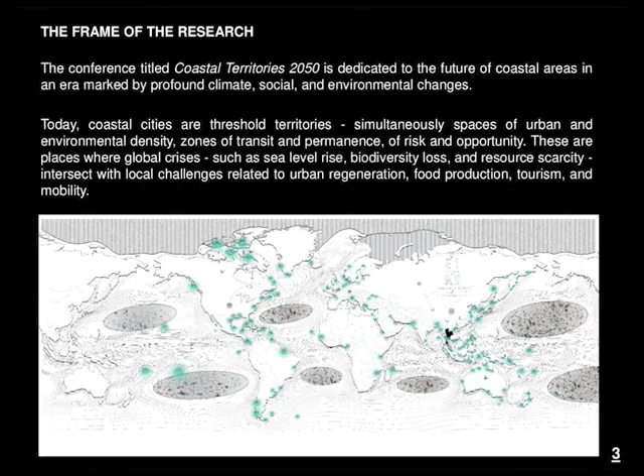In this context, the conference presents strategies and projects for adaptation and transformation, addressing key themes at the heart of global tensions that question how we inhabit the world: climate change and sea level rise, coastal erosion, extreme weather events, coastal urban regeneration, new hybrid infrastructures, architectural adaptation and resilience, conscious tourism, local production, and food security.

Intervention in contemporary territories and cities cannot be limited to repairing damage or mitigating risks. It must anticipate transformations, generate resilient models, and propose new forms of living and producing that can adapt to evolving environmental conditions. The three case studies presented today put forward architectural, urban, and infrastructural strategies that address these issues in concrete, experimental, and site-specific ways.

The conference focuses on three core thematic areas, each illustrated by emblematic case studies located in geographically distant places, yet united by a shared condition of possible transition between land and water, between center and periphery, between infrastructure and landscape, between vulnerability and opportunity. 1. Climate adaptation and amphibious architecture.

The rise in global temperatures and sea levels raises fundamental questions about the habitability of our territories. How can we design in unstable environments, balanced between land and water? The proposal developed for Ban Don Bay in southern Thailand introduces the concept of amphibious architecture as a concrete and adaptive response to a vulnerable context, blending spaces for food production, local economy, and new forms of social interaction.

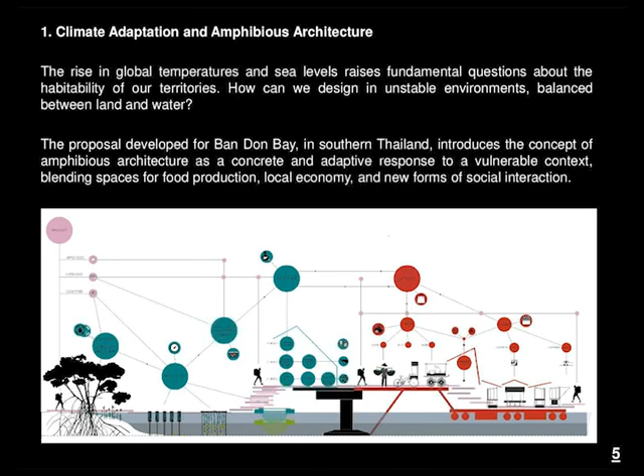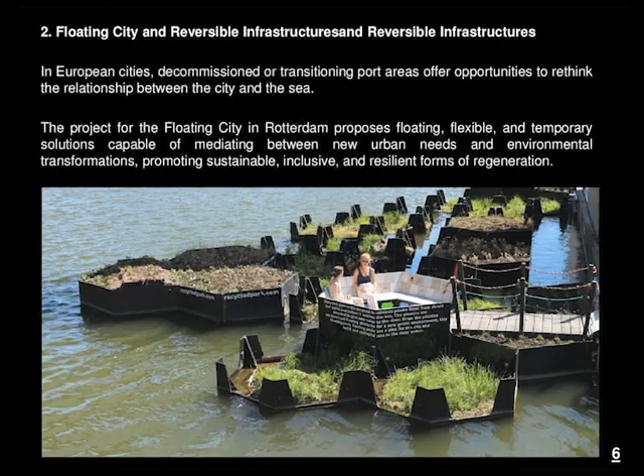2. Floating city and reversible infrastructures. In European cities, decommissioned or transitioning port areas offer opportunities to rethink the relationship between the city and the sea. The project for the floating city in Rotterdam proposes floating, flexible, and temporary solutions capable of mediating between new urban needs and environmental transformations, promoting sustainable, inclusive, and resilient forms of regeneration.

3. Urban transition and new centralities. The cities of Trapani and Palermo provide a starting point for reflecting on dynamics of obsolescence, reuse, and infrastructuring. In particular, the focus is on metropolitan mobility, connections between port and city, and the enhancement of residual spaces, proposing solutions that combine public functions, scientific research, and conscious tourism.

The goal is to redefine the coastal edge not as a boundary, but as an active interface between nature and the city.

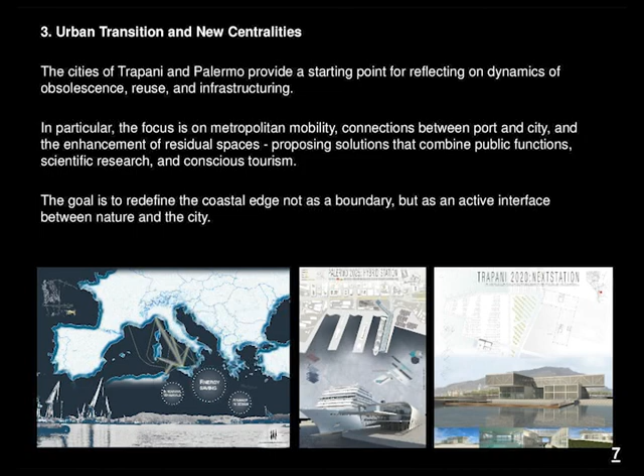Thailand 2022, Plug-in System: Sharing Farm in Don Sak. Climate change refers to variations in temperature directly or indirectly attributed to human activities. The effects connected to the hyperbolic rise of temperature are multiple, from the rise of seawater to extreme weather events to the reduction in the world's food stock.

In the south of Thailand, the climate and water of the estuaries have been drastically transformed over the last few decades. Surat Thani has become an outstanding urban and industrial center. In this place, strongly characterized by irreversible natural and anthropic phenomena, the thesis identifies a project area on the island.

of Koh Rait Ban, which is about 500 meters from the coast. The presence of a bridge connecting to the peninsula has led to the gradual creation of the urban habitat and the fishing community, which has gradually established itself in these places, exploiting the lush fauna of the Bay of Ban Don Bay.

This project is the final outcome of a thesis that originated during the 2016 workshop, Amphibious Architecture, held at the Escuela Técnica Superior de Arquitectura de Madrid, as a potential field of research for an architecture capable of adapting to the changing nature of coastlines.

This theme was explored at the international conference ICAADE 2015 in Bangkok, where the term amphibious architecture was defined as a design strategy to cope with floods using light and temporary structures capable of floating during unexpected flooding events.

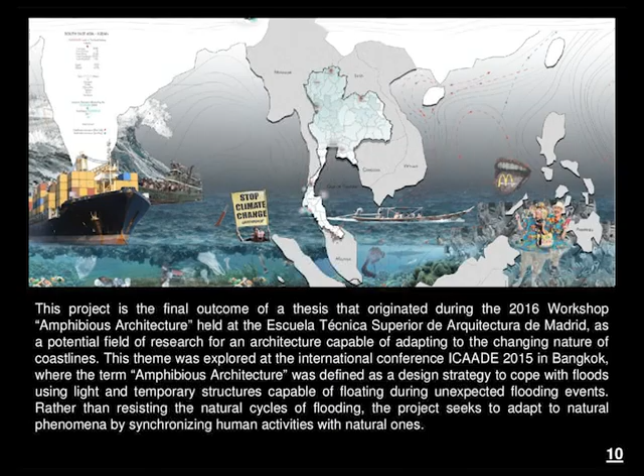Rather than resisting the natural cycles of flooding, the project seeks to adapt to natural phenomena by synchronizing human activities with natural ones. The following video shows the current state of this area, Surat Thani Province, in southern Thailand, which consists of 49% high mountain ranges and the rest muddy plains.

Surat Thani is a unique territory for experimentation due to the presence of tidal flows along the coast, which compel residents to adapt to these coastal phenomena.

Along the 100 kilometers of the lower Gulf of Thailand, the Tapi and Phum Duang rivers flow into the sea. Their convergence with saltwater creates the ideal conditions for mangrove growth and supports a rich ecosystem of wildlife between the coastline and the estuary. Tidal flows are prominent in this region, shaping the biophysical and hydraulic structure of the lower Gulf and encouraging sedimentation, resulting in water depths ranging from 1 to 5 meters.

Over the past few decades, the climate and estuarine waters have been drastically transformed. Surat Thani has become a major urban and industrial center in southern Thailand.

We visited local villages and we also visited the industry, fishing villages. I would say lifestyle and way of life and the way they work, everything is linked to the water. The time frame is continuous. It's really an amphibious architecture.

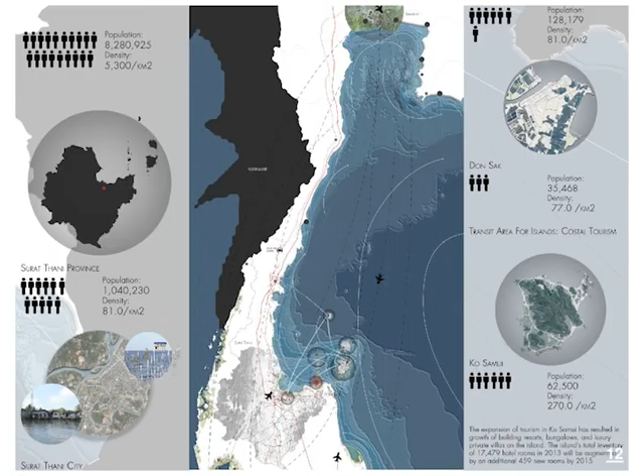In response to increasing climate instability, the project aims to propose not only an architectural intervention, but also a model of circular economy, microproduction, and food self-sufficiency involving local communities and enhancing traditional fishing practices.

In Thailand, aquaculture is a widely practiced activity, especially in the southern regions, where the presence of mangrove tree species, particularly in coastal areas and near river estuaries, favors both the formation of micro and macro habitats that make the waters rich in nutrients, and the mitigation of flood risk.

These are just some of the themes explored in this thesis, which, starting from the effects of climate on the physical and human environment, also seeks to address issues related to the economic and tourism systems of these areas, places heavily subjected to a mass Western tourism that is often disrespectful of local communities and their territories.

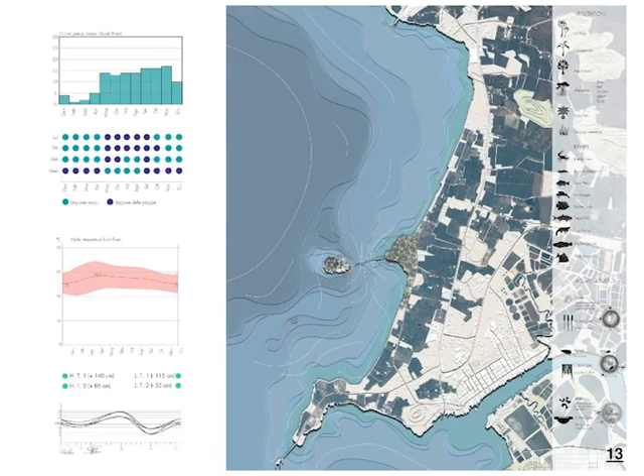It is precisely the process of tourism exploitation over recent decades that has allowed Thailand to triple its tourist numbers, based on mass consumption not only along the coastlines, but also in major cities. However, it is clear that today it is impossible to forgo the significant opportunities for economic growth, even at the risk of the peninsula's entire marine ecosystem.

Recent scientific publications have confirmed that one of the main causes of the destruction of entire coral atolls is the reckless and irresponsible tourism of recent decades.

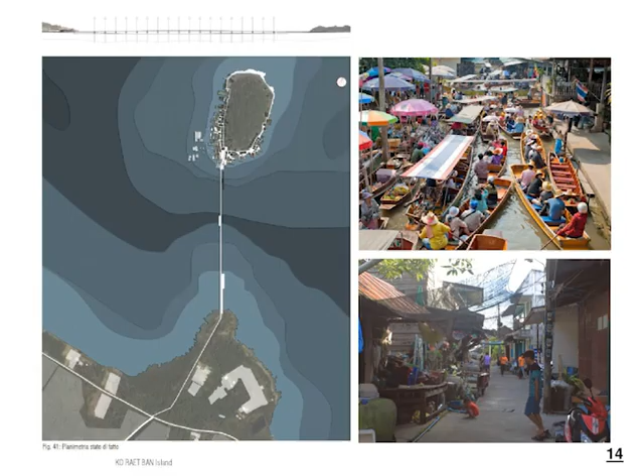The issue of economic responsibility is one of the key strengths of this thesis, which aims to broaden its field of investigation well beyond the discipline of architecture, engaging with major ecological, environmental, and economic themes that must be understood in order to explore the formal aspects of the transformations that can be proposed for these areas.

The presence of a bridge connecting the peninsula has prompted interaction with the habitat and with the fishing community that has gradually settled in the area, taking advantage of the rich fauna of Ban Don Bay.

Specifically, this thesis proposes the design of a sustainable zero-kilometer market, which uses local products by producing and consuming them on site. The main focus is the hybridization of market spaces, public use, and living. The goal is to bring together activities and flexible spaces that can be used continuously throughout the day and across seasons.

The critique of the massive exploitation of the coastline and rapid urbanization, which have led to the destruction of mangrove territories, the extinction of certain marine species, and the erosion of parts of the shoreline, frames the urgent context in which immediate action is needed, each contributing with their specific expertise.

Bandon Bay is now faced with the ongoing depletion of its marine resources, the economic exploitation of fishing, and severe pollution. Current urban development, especially along the coast, also disregards the natural tidal cycles, putting local populations at further risk.

Some questions aim to reflect on the possible future of these areas, which will soon be affected by the irreversible consequences of human and climate changes. What scenarios lie ahead for Bandon Bay? What economic prospects will there be for its inhabitants? Could the occupation of the water's surface become a moment of transition rather than a fixed frontier?

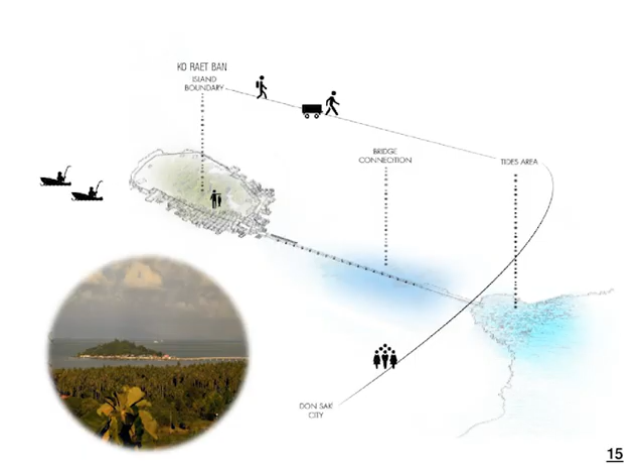The project proposes the use of materials sourced from local traditions, selected primarily based on their intended use. Two types of materials are used for the floating surface. The first, intended for modest areas, involves the use of recycled plastic bottles wrapped in fishing nets. The second, used for the construction of piers and docks, involves the use of floating plastic blocks.

The design of the various structures was developed to be built with bamboo canes, Dendrocalamus strictus, which are easily found in this region. Stainless steel was considered for selective use to reinforce the structural joints. The roofing is designed using natural, lightweight, multi-layered materials capable of providing adequate ventilation and rainwater collection. Additionally, some systems include a pulley mechanism that allows parts of the structure to move, ensuring proper shading.

The proposed activities for this area include aquaculture, fish processing, and sales. Each activity defines dedicated spaces for its related operations. The participants identified for carrying out these activities are, on one side, the local inhabitants, and on the other, tourists.

The thesis aims to link tourism activities with the traditional practices of local communities through an economic process that respects the rhythms and customs of the place. Therefore, the sale of seafood is considered a primary activity and economic resource.

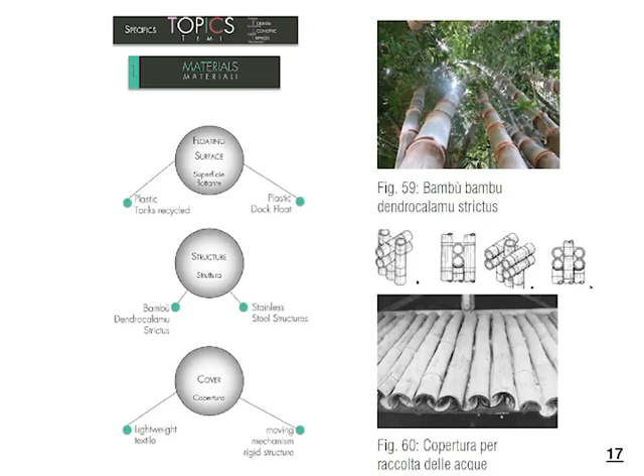A designated space is provided for processing, where oysters and mussels must be separated and purified. The sales activity includes market spaces that are organized according to the operations carried out and the types of products offered, which can not only be sold but also cooked on site. The market can function as either a permanent or a temporary installation.

Among the main themes is the idea of producing and consuming seafood at 0 kilometers, km 0. The benefits of km 0 are primarily related to the reduction of long-distance transportation of seafood and the support of sales networks located close to the production sites.

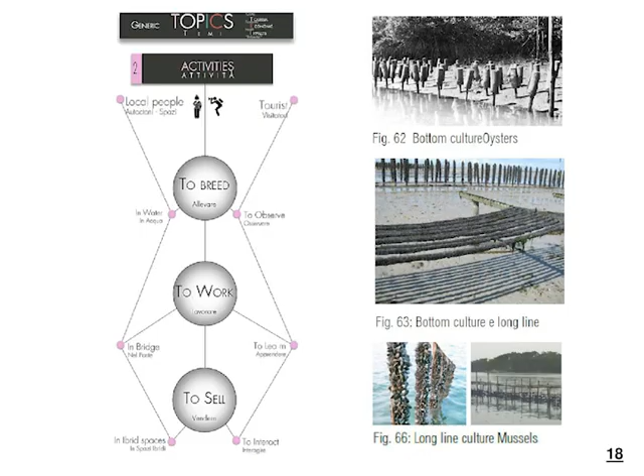Other advantages include the reduction of product costs, since the absence of intermediaries between production and sale allows for fairer pricing. It should also be noted that short supply chain products are fresher and of higher quality, avoiding the need for pre-packaging and treatments required for long-distance transportation and storage. The consistent use of traditional techniques allows for an appreciation of both the products and the local culture that defines them.

There are 3 strategies that aim to address environmental change: soft innovation, soft data, and soft urbanism. Soft innovation refers to flexible or soft strategies that explore research fields adjacent to architecture and are still in an experimental phase, such as water purification systems designed to clean the oceans from large-scale plastic pollution or to decontaminate water surfaces from diverse and non-homogeneous materials. Soft data refers to data that carry a high degree of approximation, such as sea level and tidal fluctuations, external atmospheric agents, and climate conditions. Soft urbanism refers to a system's ability to adapt and respond to sudden changes caused by external factors beyond the system's control.

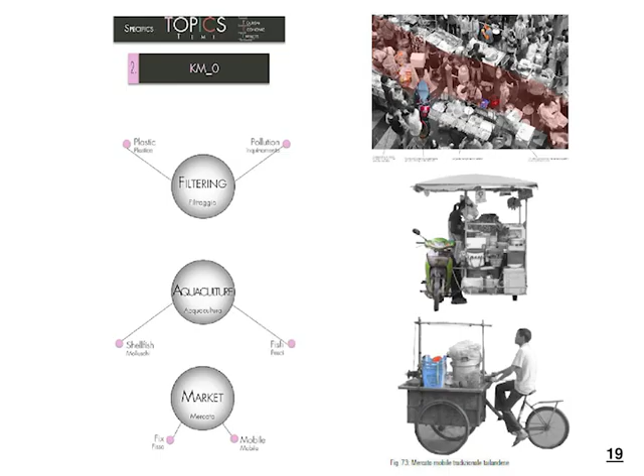The strategies of the plug-in and the soft system have been tested on the existing bridge that connects the island of Ko Raet Ban with the province of Surat Thani, serving as the backbone of the new settlement principle. The bridge retains its current function as a connector, narrowing in the sections designated for pedestrian and two-wheeled vehicle traffic. Taking into account the depth of the seabed, tidal fluctuations, and the bridge's own structural section, the project proposes the implementation of 3 types of aquaculture.

The first involves oysters, in seabeds ranging from 0 to 1.5 meters deep. The second involves mussels, in depths from 1.5 to 2.5 meters. The third is for shrimp, which require deeper waters.

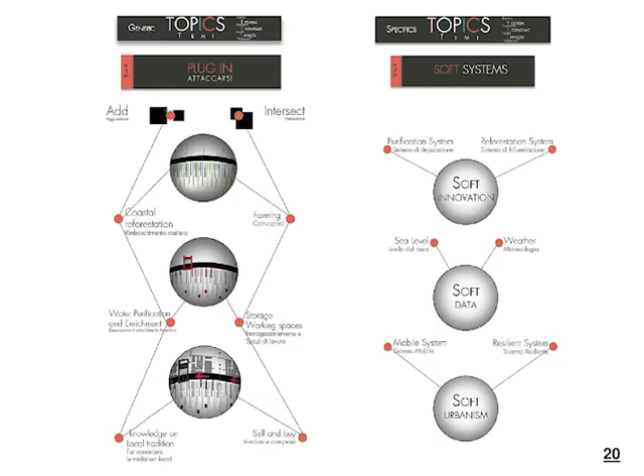A natural filtering system using mangroves, along with an artificial system employing newly tested phytodepuration techniques, allows for the efficient use of marine currents that pass along the coast and flow directly beneath the bridge with higher intensity. Each aquaculture type corresponds to a distinct architectural typology that enables the repeated processes of harvesting, processing, and selling the seafood.

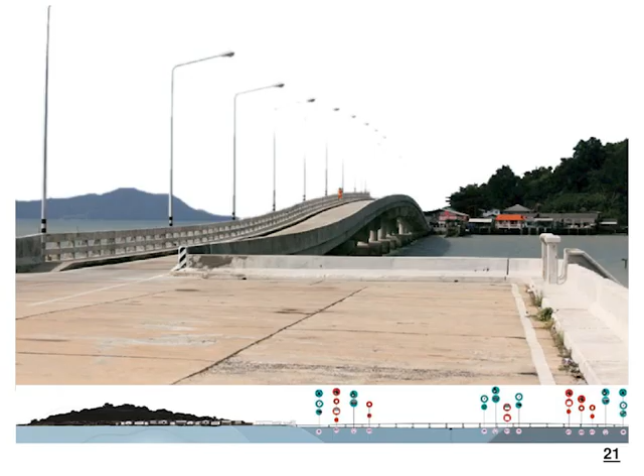Aggregation, intersection, juxtaposition, and superposition are the structuring principles of the entire project, which is physically supported by the pre-existing reinforced concrete bridge. This bridge serves as the structural backbone for a new, ephemeral imaginary that takes place on this artificial ground. All new permanent and temporary buildings related to the production and sale of seafood are anchored to the inhabited bridge, which acts as the spine of the plug-in system.

There are 3 main plug-ins in the project. 1: the aquaculture systems, which develop linearly to the left of the bridge. 2: the storage, processing, and sales spaces, which are located above, below, or alongside the bridge. 3: circulation routes, which include at least 2 types of paths, one direct and fast, and one slow and articulated.

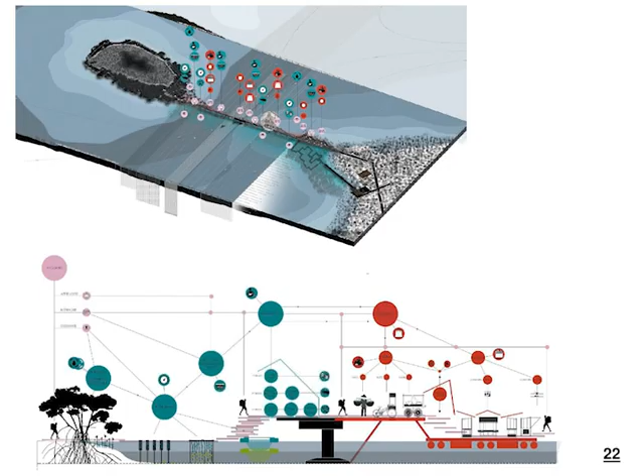The amphibious construction is based on a flotation system with vertical guides that allow the building to rise or lower according to changes in the water level. Hybrid conditions are also considered, such as a structure partially supported both by the seabed and the water. Another possible solution involves waterproofing the ground floor during the dry season and the upper floor during flooding periods.

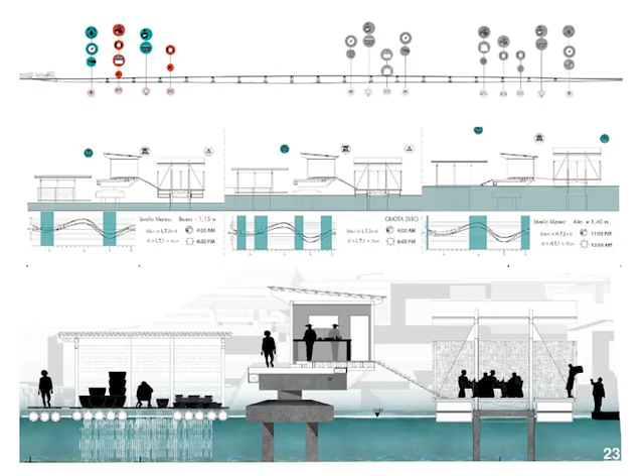To address the abnormal rise in sea levels and to provide protection against potential flooding, 3 architectural devices have been designed: floating, elevated, and amphibious structures. The mussel farming system is arranged perpendicular to the bridge with 1 collection point for every 8 farming points.

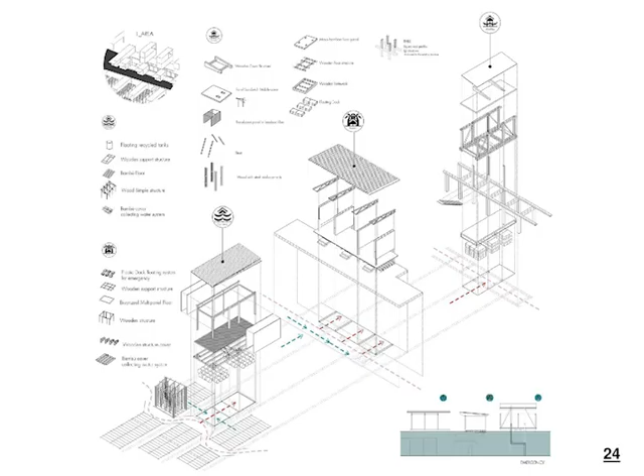The first structure is floating, used for harvesting during low tide and capable of rising with the water level during high tide. The second structure is elevated, where the catch is processed and consumed at the bridge level. Raising this structure above the crossing level allows pedestrian circulation to be separated from vehicular traffic and incorporates a floating base that accommodates the abnormal rise in sea level.

A third amphibious structure, located on a section of the existing bridge, follows tidal fluctuations through 2 rails that enable the ground to move up and down. All 3 systems are covered with a roof made of semi-bamboo canes, designed to channel and collect rainwater, inspired by the traditional roofing techniques of local houses.

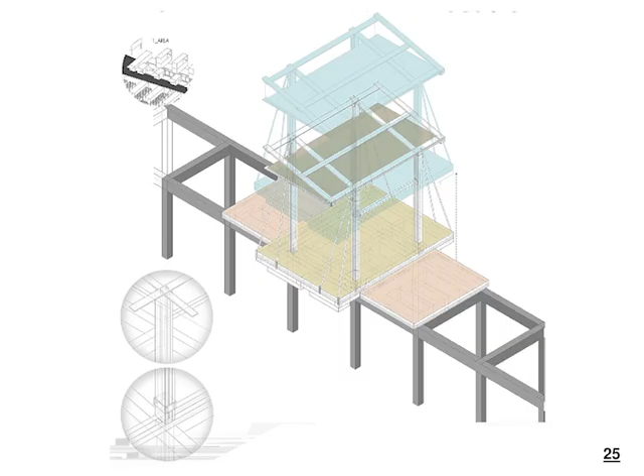Along the opposite shore of the bridge, the oyster farming is developed. Adjacent to it are located the new temporary and permanent markets. The structure designed for this area consists of a canopy that provides shade for the market where oysters are sold. This canopy is lightweight and waterproof, made from a natural woven palm leaf fabric.

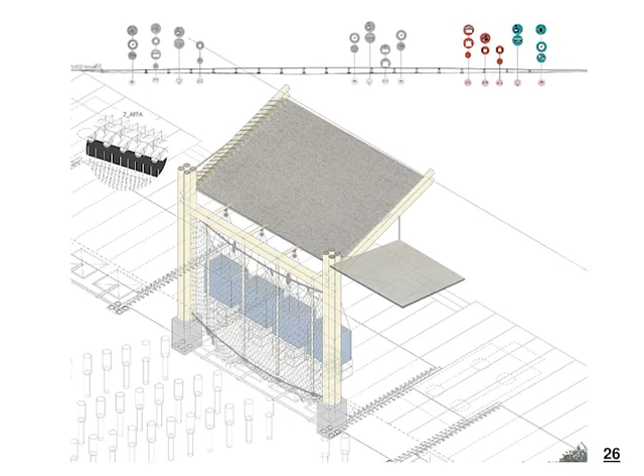Taking advantage of the tidal movement, oyster harvesting is carried out using special floating containers that, during high tide, rise to the level of the bridge to facilitate sales. The market activity takes place in the presence of tourists who observe the entire process of seafood production and sale using traditional techniques. The adaptability strategy focuses not only on the theme of living, but also on production through aquaculture to support the nutritional and economic needs of the inhabitants.

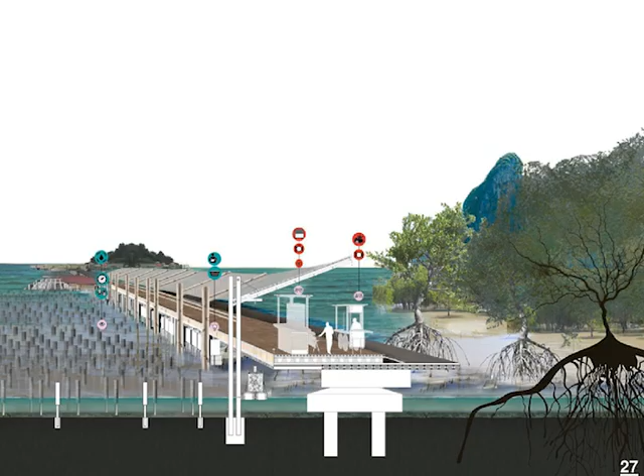The rediscovery of local cultures and traditions enables communities living in these areas to utilize water as a resource, both with and on the water, engaging in activities that maintain an active relationship between humans and nature. Traditional aquaculture techniques are combined with a construction typology that allows repeated harvesting, processing, and selling of seafood, bringing conscious tourists closer to these places and promoting a sustainable form of consumption that showcases the production process aimed at supporting the local microeconomy.

Floating City, Rotterdam 2030. The case of Rotterdam is set in the heart of Europe, within a highly developed urban and infrastructural context that is nevertheless constantly threatened by hydrogeological vulnerability. Here, in the historic port of Rijnhaven, the research addresses the need to intervene in a strategic area of the city through temporary, adaptable, and above all, floating solutions.

The Floating City project proposes a new pedestrian urban infrastructure on water, designed for citizens: a floating, flexible, and reversible network of walkways that hosts public functions and collective spaces. It aims to bridge the gap between the historic neighborhoods of Rotterdam Zuid and the densely built-up area of Wilhelminapier. In Rotterdam, water is not only a threat, but also a design resource, a foundation for creating new public spaces, collective functions, and connections between the city's uneven parts.

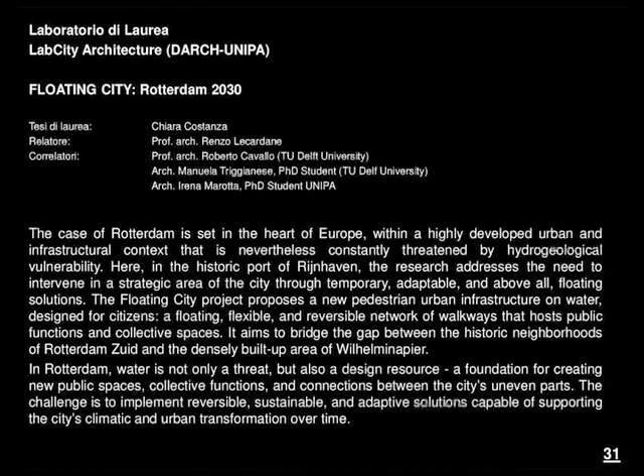The challenge is to implement reversible, sustainable, and adaptive solutions capable of supporting the city's climatic and urban transformation over time. Since 2006, the municipality of Rotterdam has initiated a reflection on the sustainable development of the city through an agenda of interventions to be implemented by 2030. Rotterdam aims to transform itself into a highly attractive city, both residentially and financially, through targeted operations focused on improving and regenerating specific urban areas, particularly along the waterfront. These large-scale territorial strategies, which also seek to address social imbalances, are outlined in the Rotterdam Stadsvisie 2030 document.

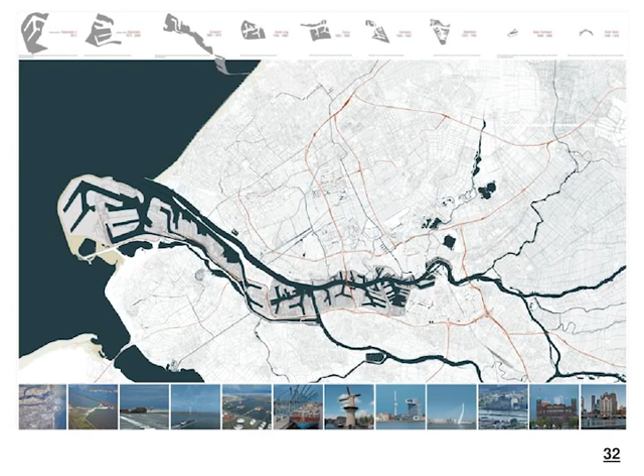First, the creation of a new skyline to give the city a renewed identity. Second, developing the port area to establish Rotterdam as an international metropolis. Third, equipping the city with an adequate system to manage flood and groundwater rise in order to combat the relentless phenomenon of rising water levels.

In the southern part of Rotterdam, historically home to migrant communities and port workers, a gradual socio-economic decline took hold over time, exacerbated by rising marginalization and unemployment. In response to this growing crisis, the municipal government launched a structural intervention through the Pact op Zuid, an ambitious urban regeneration program based on joint investments from both the public and private sectors. The initiative pursued a dual objective: on the one hand, to attract new residents, including middle-class and professional groups; on the other, to promote the development of high-quality urban projects capable of improving both the social fabric and the environmental conditions of the area.

The origins of this transformation can be traced back to the conversion of former port areas south of the Nieuwe Maas River, in what would later become known as Kop van Zuid. As traditional port functions were phased out and new urban development policies were introduced, the first residential settlements began to emerge in the area. However, contrary to expectations, it was not the Dutch citizens of Rotterdam who moved en masse into these new neighborhoods, but rather immigrants from former colonies. Drawn by the employment opportunities provided by the port, they found work primarily in low-skilled manual labor. These migration dynamics played a decisive role in shaping the sociocultural profile of the district, turning it into a multicultural crossroads, but also a territory marked by deep social inequalities and persistent challenges.

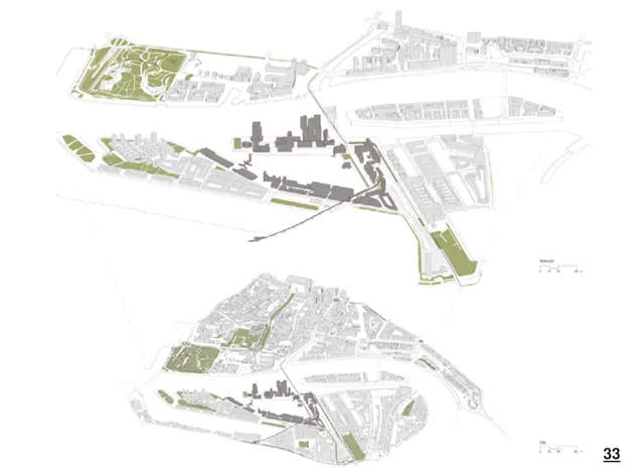In the 1980s, a design competition was launched for the development of a master plan aimed at the regeneration of the Kop van Zuid area. Four architects were invited to present their design visions: Aldo Rossi, Oswald Matthias Ungers, Stuart Walker, and Josef Paul Kleihues. A common thread in all the proposals was the influence of Carel Weeber's Paperclip project, particularly in the effort to integrate the monumental scale of the port with the residential fabric through the placement of large-scale buildings along the waterfront.

In 1987, Riek Bakker, then director of the Department of Urban Development for the city of Rotterdam, endorsed the adoption of a master plan developed by Teun Koolhaas for the transformation of the southern riverfront. The plan aimed to overcome the historical isolation of Kop van Zuid, raising its urban quality to a level equal to, or even surpassing, that of the northern part of the city. Its key objectives included the creation of a wide boulevard and a new bridge to extend the coolsingel axis southward, the construction of tall buildings along the quay, echoing the original port scale, and the development of green pedestrian pathways to reconnect urban parks with the city's various neighborhoods, thus promoting greater spatial and social integration.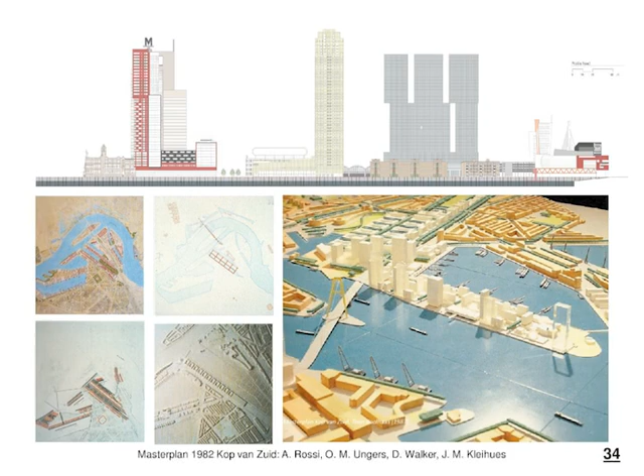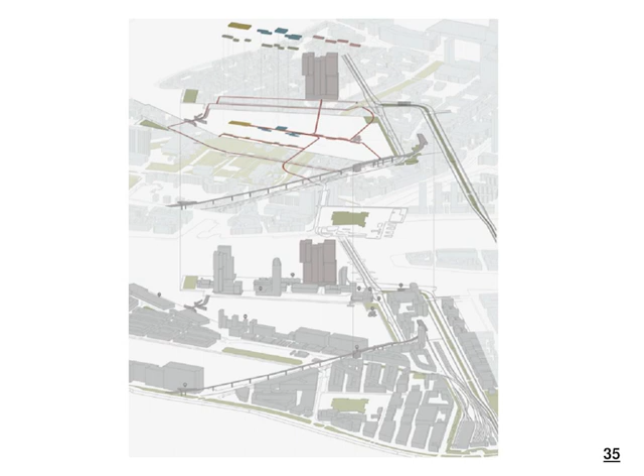The project seeks to enhance the inherent qualities of the area without disrupting the existing relationship between land and water. On the contrary, it reinforces those elements that have shaped the port landscape and the spatial organization of the site for nearly 2 centuries. A key feature of the settlement strategy is its long-term flexibility, the ability to adapt to the evolving needs of the community by accommodating diverse functions and encouraging dynamic use of space.

In particular, the introduction of recreational activities within an innovative and experimental framework aims to stimulate pedestrian movement and offer new gathering spaces. These include public meeting areas situated directly within the waterfront basin of the Port Bay. The project also envisions a network of pedestrian pathways that extend from strategic points in the surrounding neighborhoods and converge at the heart of Rijnhaven, where the main activities and services are concentrated.

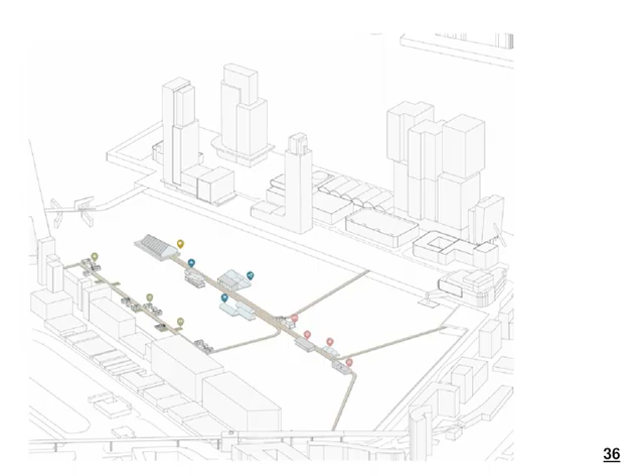To this end, several key nodes have been identified as anchor points for a system of floating walkways designed to enhance accessibility and strengthen the physical and social connection between different parts of the city. 4 paths converge and merge over the water, forming a network of pedestrian and cycling walkways equipped with urban furniture and rest areas.

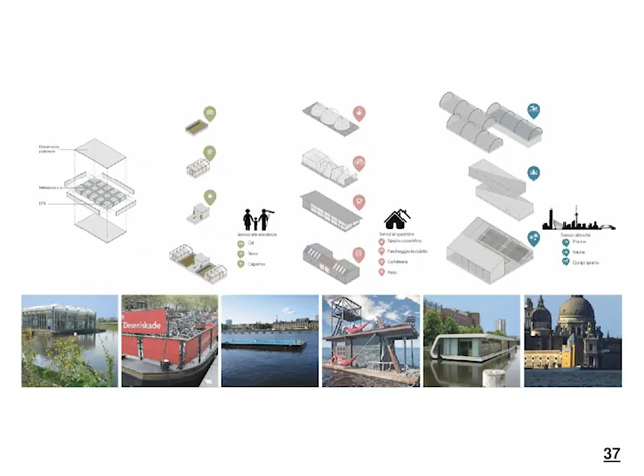Along this network, recreational and leisure activities are distributed into 3 main categories, structured according to the seasons. On the southern quay, a detached pier accommodates urban gardens, greenhouses, and support spaces for agricultural activities, designed to engage families and local communities with a capacity of around 100 people. Along the central road, temporary floating modules house neighborhood services, while near the quay, sports facilities are positioned to support both summer and winter activities.

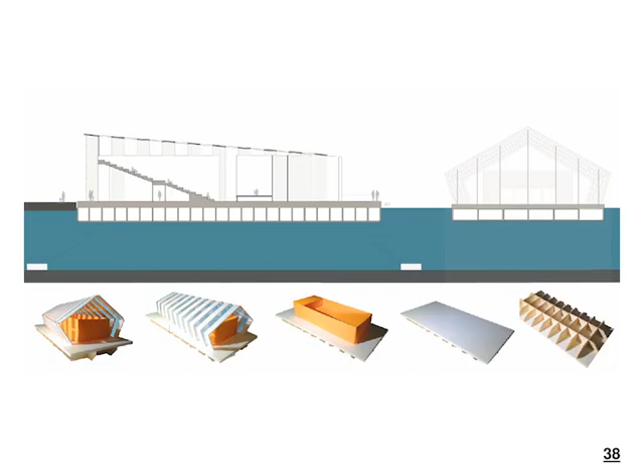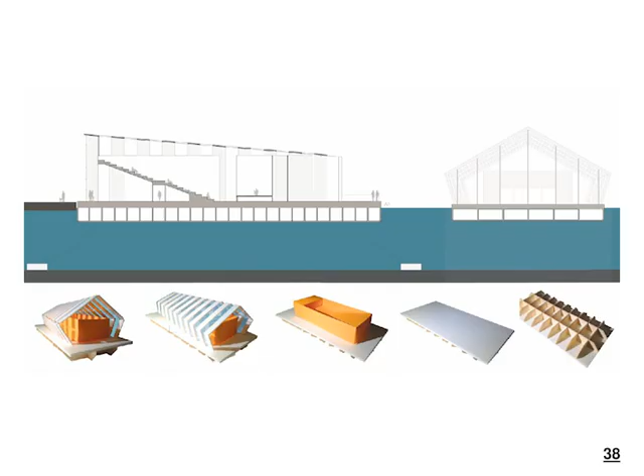The route culminates in a floating theater designed to host musical events and theatrical performances. This structure is completed by a panoramic terrace overlooking the water, conceived as the final highlight of the path and a contemplative public space.

The thesis project proposes a flexible and temporary approach to the regeneration of Rotterdam's disused port areas, aiming to reactivate them through lightweight floating infrastructures and seasonal activities. The intervention seeks to strengthen connections between the 2 sides of the city, promote new relationships between citizens and water, and create spaces for gathering and social interaction.

The reversibility of the structures ensures environmental respect for the port context and greater adaptability to climate change. The project acts as a transitional element between the city center and the historic neighborhoods of Rotterdam Zuid, contributing to the reduction of urban and social disparities.

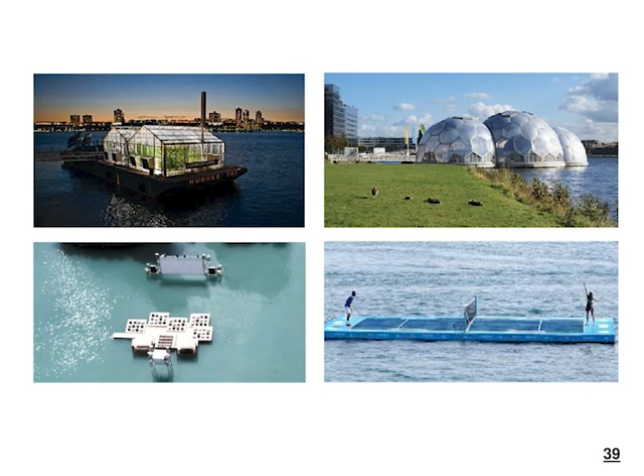In the context of the profound transformations taking place in European cities, the themes of sustainability and urban regeneration have assumed an increasingly central role. Today, attention is focused on design processes aimed at revitalizing the consolidated urban fabric and redeveloping degraded or obsolete coastal areas. Within this framework, urban and architectural design acts as a mediator between the existing reality and an unstoppable process of transformation characteristic of cities in transition.

This process, with its opportunities and challenges, seeks to strike a balance between the creation of new spaces and the conscious reuse of the existing built environment. In this perspective, 2 projects are presented, one developed in the port area and salt flats of Trapani, and the other in the port area of Palermo.

Both projects engage directly with the coastline and the sea, foundational and generative elements from which to address the issue of urban obsolescence, a condition shared by many European cities, yet capable of offering valuable opportunities for design experimentation.

City in Transition, Trapani 2020. In the face of the profound social, economic, cultural, and climatic changes that have impacted European cities over the past decade, the urgent need to radically rethink how cities are organized and transformed has become increasingly evident. Today's challenges call for a redefinition of urban transformation models, steering design interventions toward principles of sustainability, resilience, and inclusion.

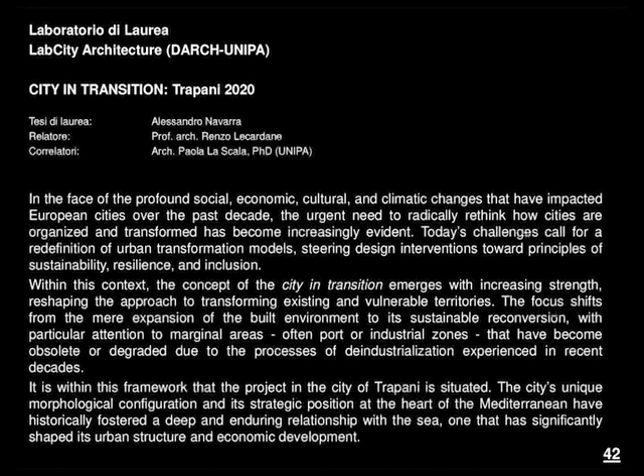It is within this framework that the project in the city of Trapani is situated. The city's unique morphological configuration and its strategic position at the heart of the Mediterranean have historically fostered a deep and enduring relationship with the sea, one that has significantly shaped its urban structure and economic development. The port system, a key infrastructural and identity-forming element, now represents a critical area in need of rethinking, not only in functional terms, but above all as an opportunity to redefine the relationship between city, landscape, and environment.

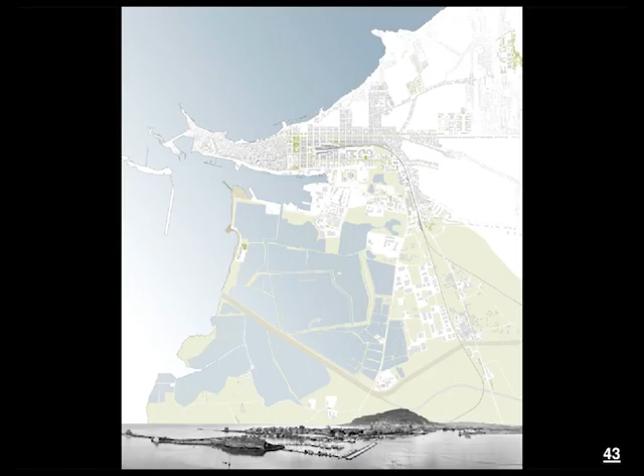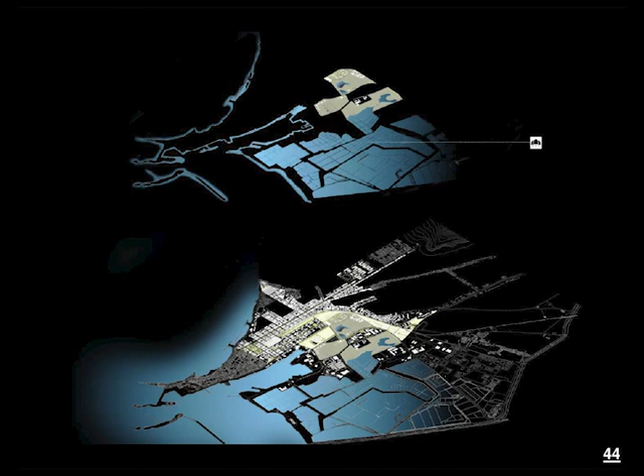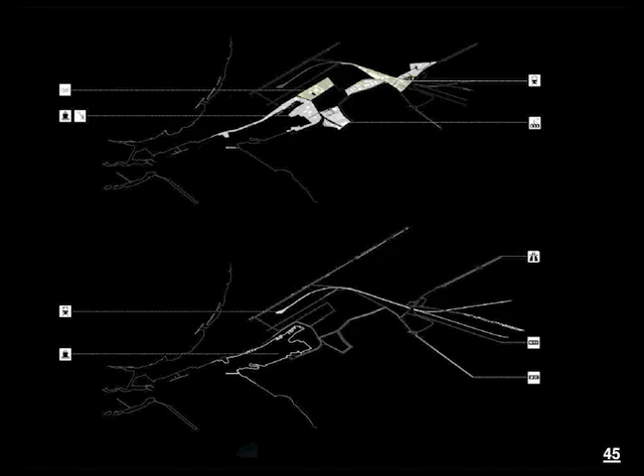In 2005, the city of Trapani experienced a significant phase of urban revitalization thanks to numerous restoration initiatives, which culminated in the preparation and organization of the international sporting event Trapani Louis Vuitton Acts 8 and 9. On the occasion of this major event linked to the America's Cup, Trapani benefited from a series of port redevelopment projects aimed at improving the functionality and accessibility of its waterfront, particularly targeting port areas that had fallen into severe decay and were inadequate to meet new urban and tourist demands.

The interventions carried out during this period involved a comprehensive reorganization of the port infrastructure, including significant architectural transformations, the repurposing of passenger docks, and the removal of visual barriers that had limited the direct connection between the city and the sea. These efforts contributed to restoring the waterfront of Trapani as a new urban focal point, enhancing its accessibility and spatial quality, and fostering a renewed relationship between the city and its quintessential identity element, the sea.

Continuing along this development path, in August 2014, a group of local operators and entrepreneurs formalized the establishment of the new consortium of the Port of Trapani, a cooperative consortium company with limited liability. The founding act sets forth, among the consortium's primary objectives, the promotion, support, and enhancement of the Port of Trapani, as well as its infrastructure system and surrounding territory, with particular attention to safeguarding it from speculative practices that could undermine the area's cultural and economic value.

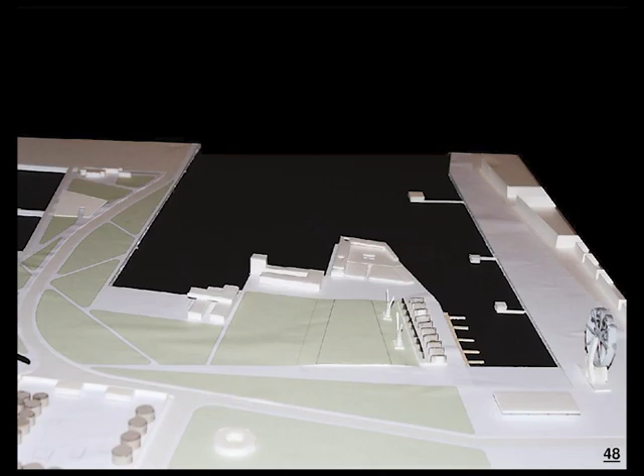The gradual decommissioning of shipyard activities has paved the way for the transformation of the city's northern waterfront, giving rise to a long coastal promenade that runs directly alongside the sea. This new urban axis features the new ferry terminal for hydrofoils, a public building of strategic importance, and a system of floating plazas integrated into the docks dedicated to recreational boating, helping to redefine the relationship between the city and the water in a contemporary way.

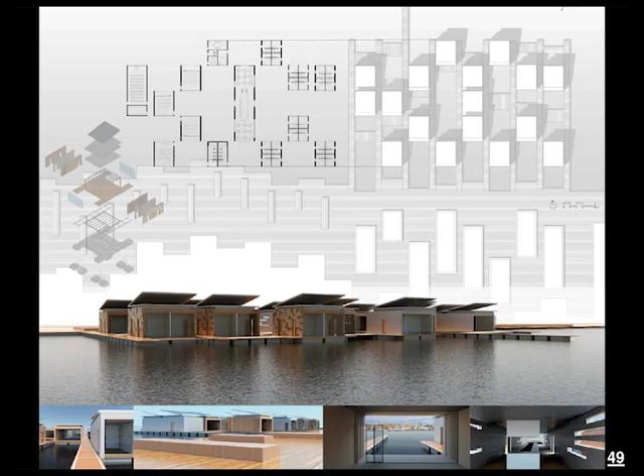The promenade traces the city's coastline, extending southward to intersect with the axis that hosts various sports facilities and connects directly to the Salt Pan Urban Park, located a short distance from the urban core. In this context, the redefinition of the waterfront takes on a systemic value, entrusted to a group of new buildings that reconstruct the urban edge and articulate high-quality public spaces, while incorporating functions related to marine scientific research.

Among the new urban services planned, the project includes an experimental aquarium and floating residences designed to accommodate researchers and professionals in the field, shaping a new urban ecosystem that brings together landscape, innovation, and scientific culture. This new seafront thus emerges as a complex and multifunctional system capable of activating urban and environmental regeneration dynamics in a strategic portion of the city.

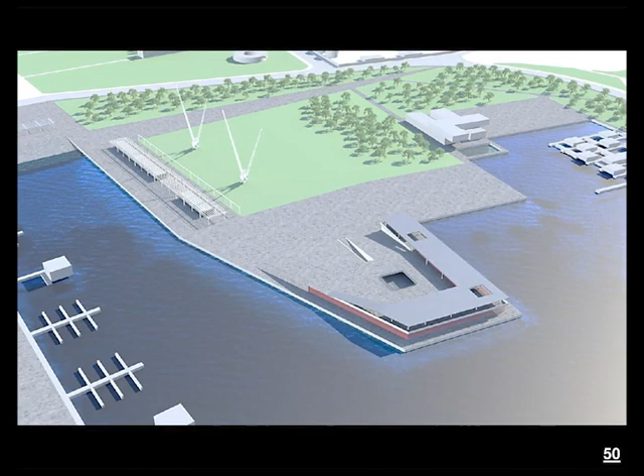The project involves the creation of a ferry terminal, a concept store, a yacht club, and an urban park—four distinct but closely interconnected interventions conceived as strategic elements for the regeneration of the port area. Unified by a new stone-paved surface, they form a pedestrian and landscaped pathway that reconnects the buildings with surrounding public spaces.

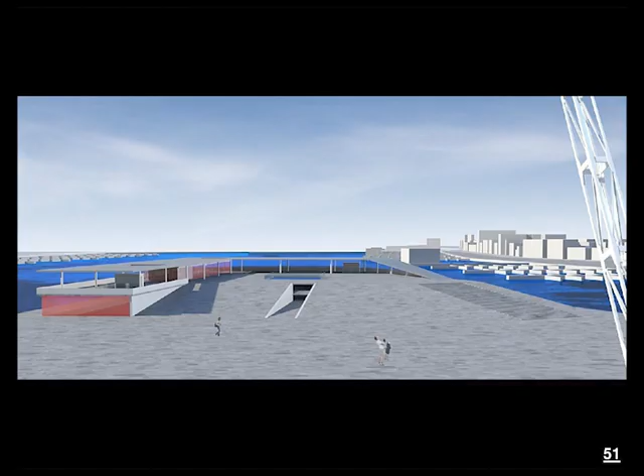The intervention aims to encourage collective life and social interaction among both residents and the growing number of tourists visiting Trapani by creating new gathering places near the sea. The concept store is conceived as an urban device that reinterprets the notion of public space, organized around a gently sloping ramp that rises from street level to a panoramic terrace.

The overall objective of the project is to return to the city a set of new spaces that can host activities and services, transforming the decommissioned port area into an expansive urban park, where open space becomes a key resource for exploring new ways of inhabiting and experiencing the waterfront.

In contrast to the regular, compact, and homogeneous urban grid of the 19th century city, the southern part of Trapani is characterized by a fragmented and discontinuous industrial fabric. This area has developed without a clear compositional order or defined settlement principles, creating large voids within the urban structure and disrupting the continuity of the city's overall layout.

This fragmented system extends toward the port area, which is itself marked by extensive disused surfaces, infrastructural voids, and natural edges, in direct relationship with the oriented nature reserve of the salt pans of Trapani and Paceco. The industrial fabric historically hosted functions related to salt production and processing, recreational boat building, and sports facilities, including the municipal swimming pool.

Today, however, many of these activities are only marginally integrated into the urban context. The project area identified in the Trapani 2030 strategic vision proposes a radical transformation of this part of the city through the gradual decommissioning of shipyard activities and the creation of a major promenade along the coastline. This new pedestrian axis aims to re-establish both a visual and functional connection between the city and the sea, linking the key public interventions planned for the regeneration of the port area.

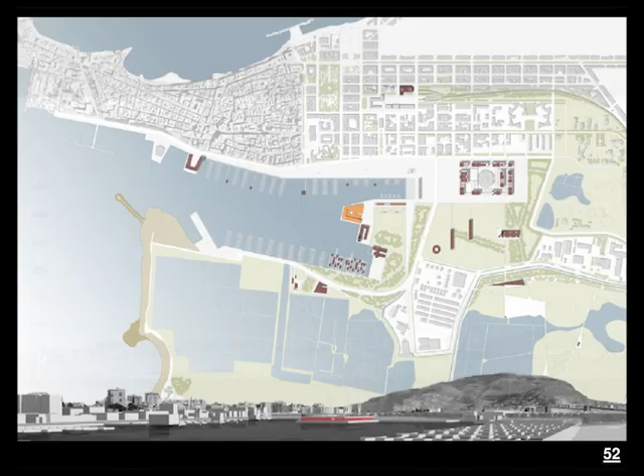The project aims to offer an alternative interpretation of the current condition of Trapani's coastal areas and port system, with the primary objective of promoting social aggregation through urban regeneration. This goal is complemented by the enhancement of the existing natural landscape and the introduction of new services at both urban and territorial scales, capable of triggering virtuous processes of transformation.

Particular attention is given to the relationship between the new urban park and the Salt Pan Nature Reserve, an interplay of physical and symbolic continuity that the project seeks to strengthen. The park is conceived as a direct access point to the reserve and as a connective device between the city and the cultural and environmental infrastructure of the salt pans, effectively extending the reach of this landscape system to the edges of the historic city.

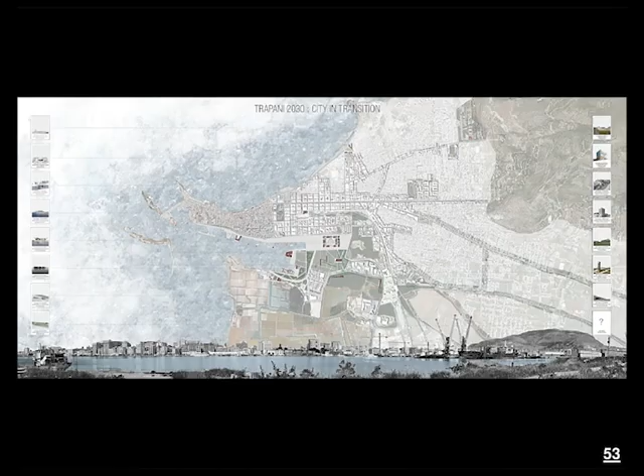Numerous projects have been developed in recent years within the graduation workshop, representing an important opportunity to rethink in a systemic way not only the coastal front of the city of Trapani, but also the modes of access and enjoyment of the new Parco delle Saline, conceived as a strategic place between the consolidated urban fabric and the Riserva Naturale Orientata delle Saline di Trapani e Paceco.

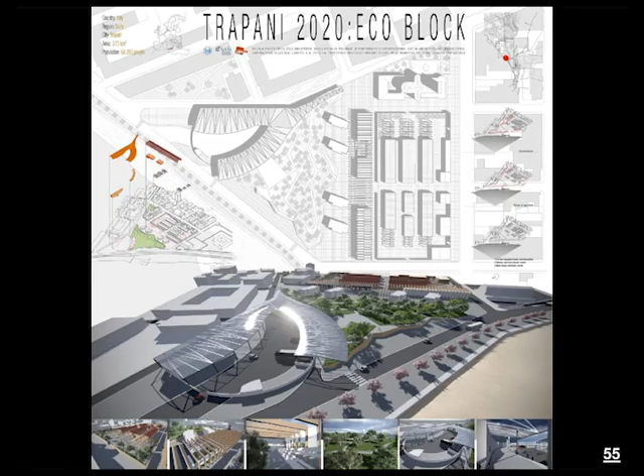The reserve, due to its extraordinary environmental, cultural, and productive value, represents one of the most significant and distinctive landscape elements of the entire territory. It is a complex and delicate ecosystem where the presence of the sea and the traditional salt production activities have shaped, over the centuries, a landscape of great charm, combining biodiversity, intangible heritage, and work culture.

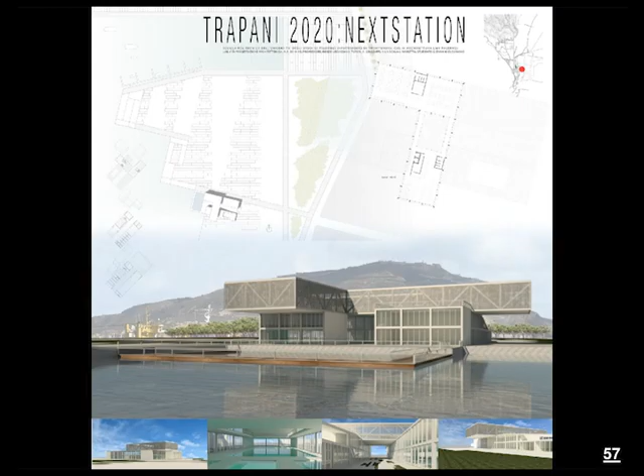The reserve is not merely a place to be preserved. It is a living ecological infrastructure that constantly interacts with the city and its future development.

From this perspective, the Parco delle Saline becomes a fundamental territorial device designed to ensure gradual, respectful, and qualified access to the protected area. Through a network of pedestrian and cycling paths, observation points, and light facilities for rest and environmental interpretation, the park proposes itself as an accessible public space aimed at both residents and tourists, offering sustainable and conscious experiences of enjoyment.

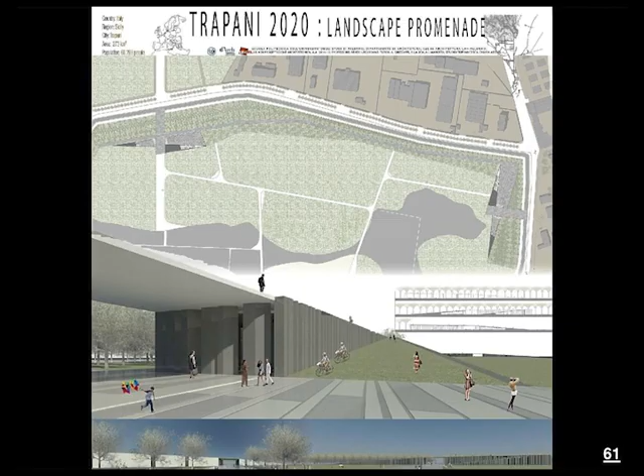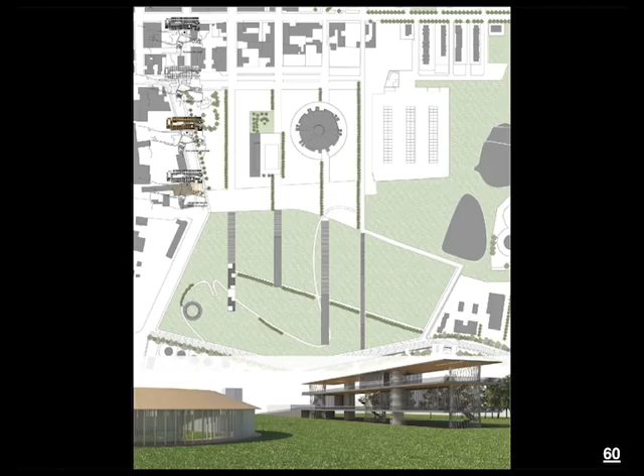The main objective of the projects is to enhance the salt marsh landscape without compromising its ecological balance, creating conditions for a new form of urban edge livability that fosters the encounter between nature, culture, and community. In this scenario, the relationship between city, park, and reserve takes shape as a continuous landscape and functional continuum capable of regenerating not only physical spaces, but also social relations and identities.

The Floating Plain, Palermo 2030.

Jacques Rougerie Foundation, 2016, Innovative Architecture for the Sea.

A city of the sea, of ports, and of travelers, Palermo has shaped its urban form in close relationship with its territory. The sea, rivers, and mountains, and their interaction have defined a complex landscape marked by both continuity and transformation. This stratification has fostered deep connections between the city's historical layers and its contemporary identity, linking the built environment with its maritime infrastructure, which continues to play a central role today.

Currently, the Port of Palermo stands out for its excellence in shipbuilding and port logistics, particularly in the container shipping sector. Alongside the historic old port of La Cala, the city now hosts modern facilities for both freight and passenger traffic, forming a multifaceted and constantly evolving system.

Within this context, the project, The Floating Plain, proposes the construction of a new cruise terminal designed to innovatively integrate the operational needs of the port with the city's growing tourism demands.

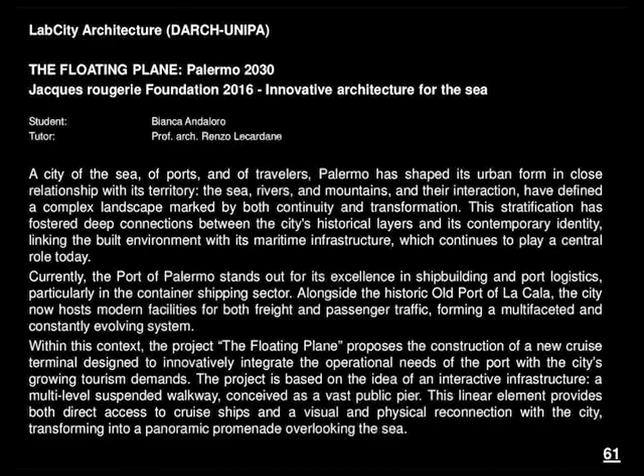The project is based on the idea of an interactive infrastructure, a multi-level suspended walkway conceived as a vast public pier. This linear element provides both direct access to cruise ships and a visual and physical reconnection with the city, transforming into a panoramic promenade overlooking the sea.

The research offers a critical reading of several strategic locations in Palermo, examining them through the lens of infrastructural relationships, both connections and disconnections. Infrastructural disconnection gives rise to urban enclaves, true relational voids that disrupt the continuity of public space and challenge the very idea of the city as a unified organism.

In contrast, connectivity enables the formation of interdependent and interacting urban areas, which can be understood through the concept of an urban archipelago, where each island functions as a node within a wider network.

Within this framework, the system of new stations along the Palermo railway ring, particularly the Politeama, Porto, and Libertà stations, represents a valuable opportunity to expand and strengthen urban relationships. These are zones deeply characterized by the intersection of the city, public space, and infrastructure, capable of generating new urban centralities and promoting innovative forms of livability.

The city is thus reinterpreted as a complex and layered space of relationships, knowledge, exchanges, conflicts, economies, and both material and immaterial forms of production, continuing to serve as the privileged horizon for contemporary urban design strategies.

The challenges posed by public urban mobility, due to their inherently multidisciplinary nature, demand a hybrid and cross-cutting approach, one that is able to grasp the intricacies of the contemporary city and anticipate the needs of the future urban condition.

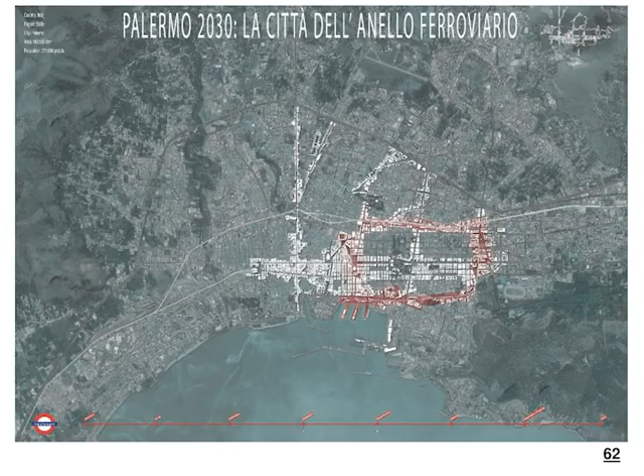Within this framework, metropolitan mobility takes on an added value, no longer seen merely as technical infrastructure, but as an urban device capable of generating new forms of public space and connectivity.

In particular, in the context of Palermo's port, several critical issues have emerged that have shaped the design approach. One of the central themes is the proximity to the sea, a condition that calls for a reinterpretation of the relationship between the city and its maritime front, positioning the port not as a separate entity, but as an integral part of the urban system.

The port thus becomes a fully fledged element of urban design, charged with new meanings and recognized as one of the keys to unlocking the transformative potential of the coastal edge.

Within this scenario, the project explores the possibility of connecting a new cruise terminal to the city, overcoming the physical and functional barriers that have historically kept the two apart.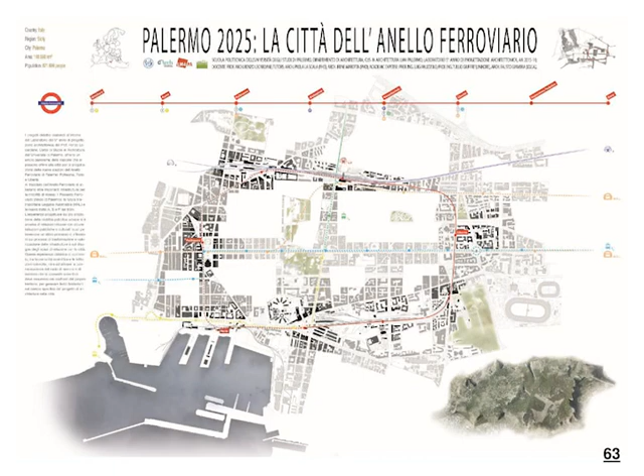The port is reimagined as an urban extension beyond the limits of maritime jurisdiction, a space that can accommodate public, collective, and cultural functions, reinforcing its role as a generator of urban life.

The project focuses specifically on the redefinition of the area between the Porto metro station and the Santa Lucia Pier, one of the points closest to the city's urban fabric.

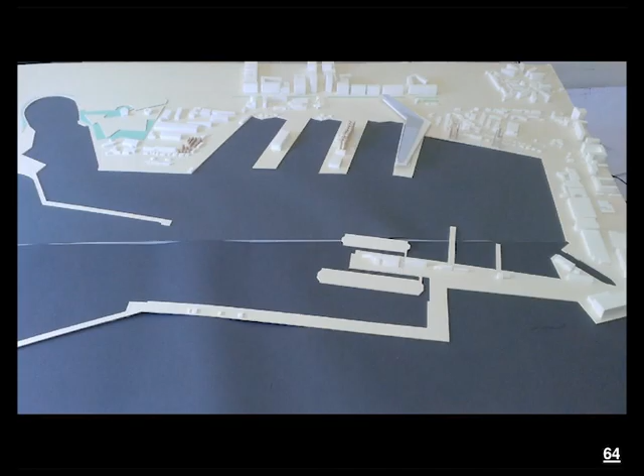The intervention involves the design of a new cruise terminal capable of establishing a direct connection between the city and the port, two systems traditionally perceived as separate or even in contrast with one another.

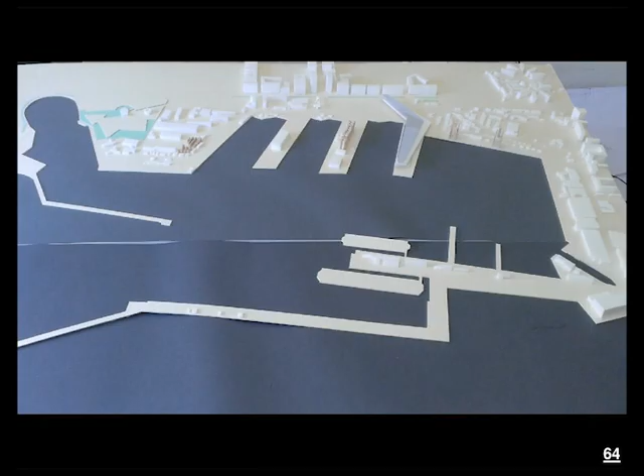On one side, the accessible and public urban space. On the other, the port area, a functional and infrastructural enclosure governed by controlled flows and oriented toward the movement of goods and passengers. The aim of the proposal is to transform the cruise terminal into an urban device, one that can reactivate spatial and social relationships, restore continuity to the coastal landscape, and generate new public and collective uses.

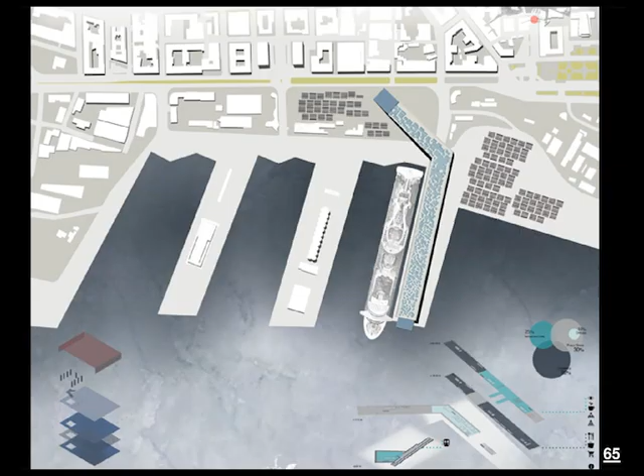The terminal thus becomes an intermediate space, a filter between city and sea, opening the port to the city and the city to the port in a renewed and integrated vision of the coastal urban territory. The intervention is conceived as a hybrid and multifunctional building, housing both the new Porto metro station and the new cruise terminal.

While the metro station is part of Palermo's ring railway, a strategic infrastructure that connects the city's 20th century districts and promotes a sustainable, widespread urban mobility, the cruise terminal is envisioned as an elevated urban device that redefines the relationship between the city and the sea.

It does so through a sequence of suspended multifunctional spaces, panoramic terraces, public plazas, offices, shops, restaurants, and leisure areas. This multi-level system provides direct access to cruise ships while also creating a visual and functional reconnection with the city, transforming the pier into a true urban promenade overlooking the sea.

Far from merely reorganizing port functions, the project offers Palermo a new coastal urban interface where work, travel, and leisure converge in a contemporary public infrastructure, open, inclusive, and future-oriented.

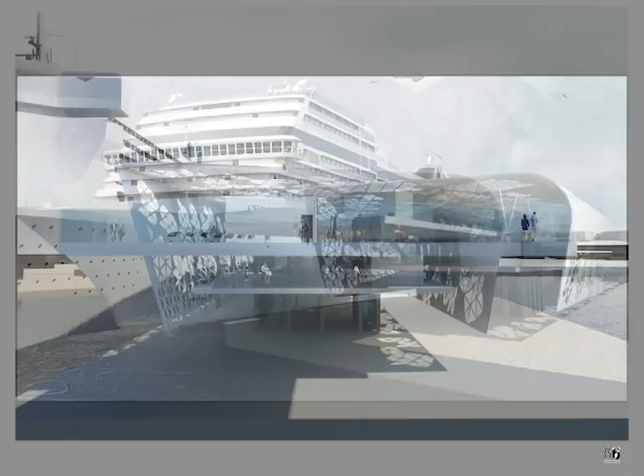The project is based on a highly technological structural system composed of a sequence of autonomous blocks made up of pillars and stairwells to which suspended floors are attached. The building is elevated on pilotis above the port quay, avoiding any interference with the current container handling activities that continue along the waterfront.

This configuration allows for free and flexible use of the interior spaces, promoting the functional adaptability of the building. Special attention has been given to access points, visibility, and traveler safety, as well as the organization of emergency exits, explicitly drawing inspiration from solutions adopted in modern airport terminals.

The building is wrapped in a continuous and sinuous shell that defines the building's profile from the metro station exit to the cruise terminal foyer. The facade is not a solid surface, but animated by dynamic openings that create areas of light and shadow, enhancing the perception of movement and guiding travelers toward boarding.

The facade structure was designed using parametric design techniques and manufactured through 3D printing with low-impact geopolymer materials. Each triangular module is unique, contributing to the creation of a highly performant architectural envelope that combines energy efficiency, technological innovation, and aesthetic quality. The project also explores energy aspects.

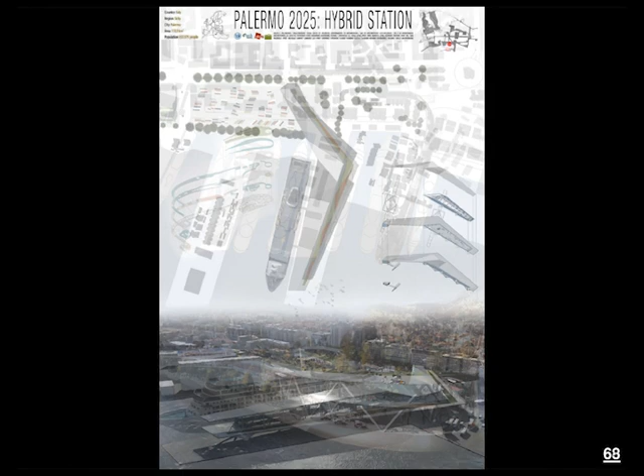The integration of intelligent flooring allows the conversion of the kinetic energy generated by pedestrian flows into electrical energy. Further projects have been developed on the topic of the cruise terminal and the Porto rail ring stop, serving as valuable opportunities to deepen and reflect on the complex relationship between the city and the port.

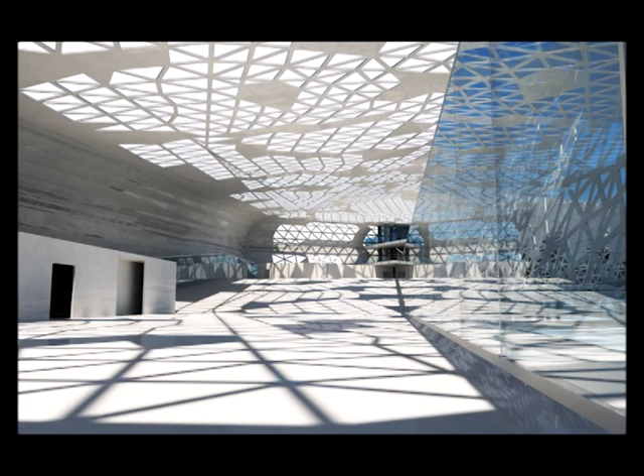In an era marked by unprecedented environmental, economic, and cultural transitions, coastal areas emerge as paradigmatic spaces of contemporary times. Physical and symbolic thresholds where ecological vulnerability, urban transformations, and demands for spatial justice intertwine.

The conference Coastal Territories 2050 seeks to provide a comprehensive theoretical and design framework capable of exploring these domains through action research, adopting a transdisciplinary approach based on three complementary conceptual cores: climate adaptation, reversible infrastructures, and urban transition.

The case studies presented, from the Thai Bay of Bandon to Rotterdam and the coastal fronts of Trapani and Palermo, differ in scale, context, and techniques, but share a common methodology.

Architectural design is not reduced to form, but serves as a tool for reading, interpreting, and transforming the environment. This reveals an integrated approach that links technical knowledge, ecological understanding, narrative capacity, and political awareness.

Such an approach entails taking responsibility toward vulnerable territories and the communities inhabiting them, shifting the project from product to process, from building to infrastructural, cultural, and environmental interface.

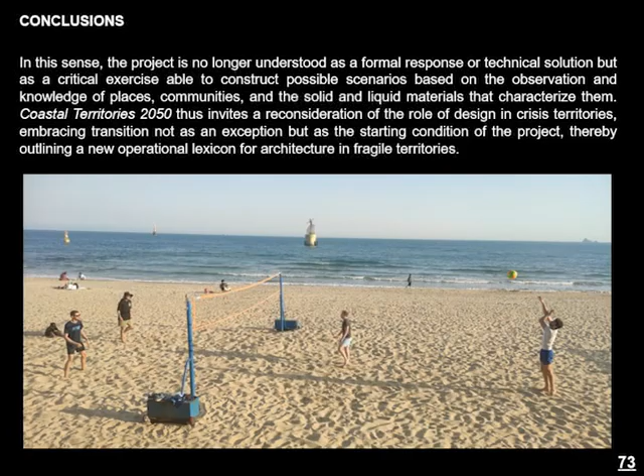Coastal Territories 2050 thus invites a reconsideration of the role of design in crisis territories, embracing transition not as an exception but as the starting condition of the project, thereby outlining a new operational lexicon for architecture in fragile territories.